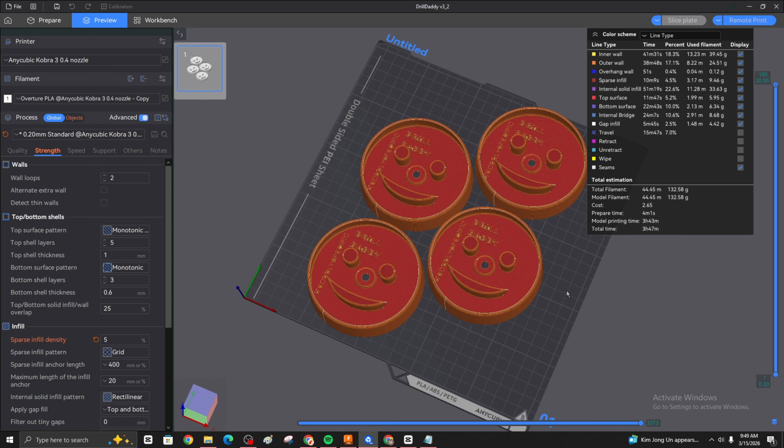And so I want to show real quick what this looks like in the slicer, and how you can kind of see the impact that the infill can have on the structural integrity of this design. So right here I have a plate of DrillDaddies that supposedly would be ready to print, right? So at a glance, these look just like any other print, but if you go down through the layers, you can see right off the bat that there is no structural support going down all the way through the eye holes, through the mouth.

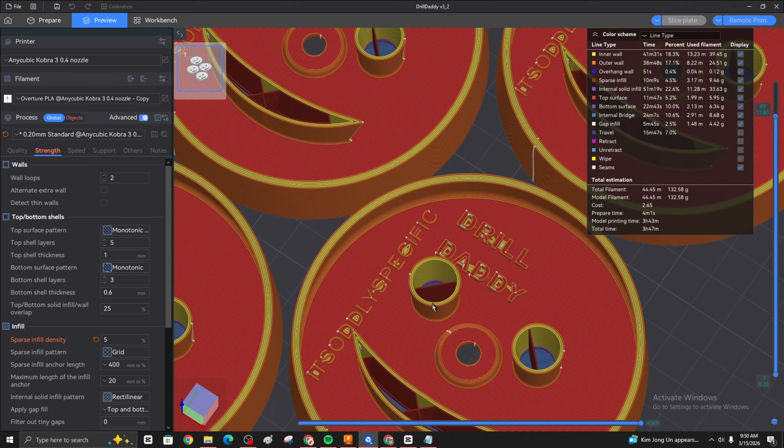Zoom back out. And if I go further down into the interior of the part, this is where we see that there are only 2 incredibly thin walls that are holding what's supposed to manage the torque of a drill. So, obviously this is going to fail when you print it.

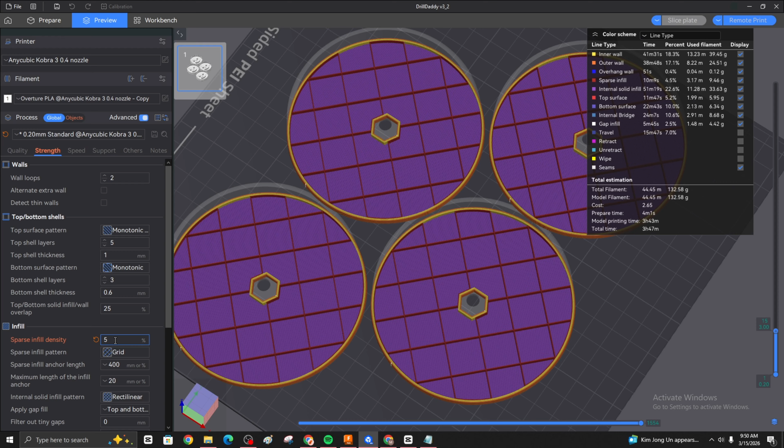Now, the first batch that I had sent out had an infill of 20%, which is what I use on my personal drill when I was first testing this design, and I went through with all my iterations. I'll show you what this looks like on the slicer.

So at 20%, you can see that this is already a drastic improvement. If you're pushing around the body of the part, there's nowhere that your thumbs are going to push through any of the top or bottom walls. The nut is being held in place by quite a few different locations.

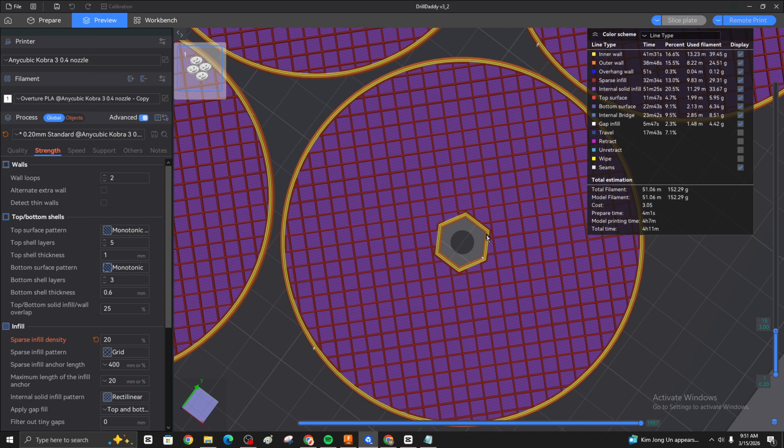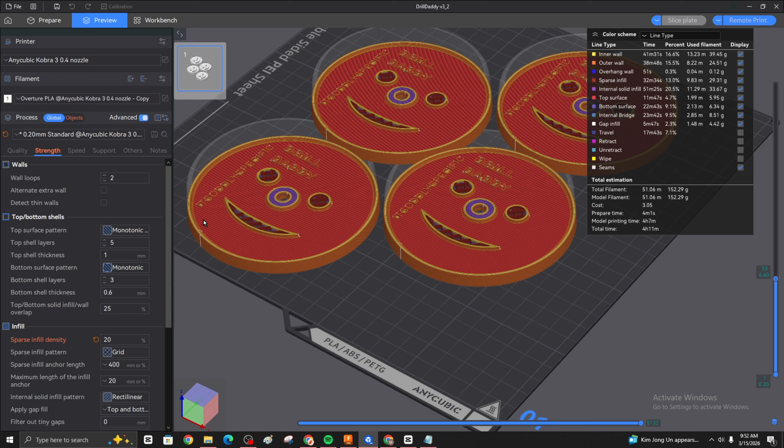And then when you zoom out a little bit and look up through the rest of the print, that grid carries up into the eyes and the mouth and actually provides a bit of support there. So while I'm in here, I'm realizing some people realistically are probably more rough with their tools than I am. Maybe they have stronger drills. And so for this batch that I'm sending out to people as replacements and hopefully future orders, I'm going to do a couple things.

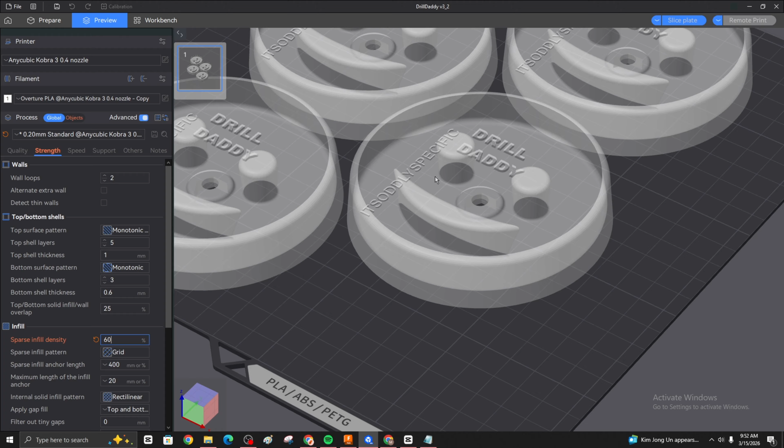I'm going to go from 20% infill. I'm actually going to increase this, I think, to 60. You can see how much denser that is in the eyes. I'm not really too worried about the eyes and the mouth breaking, it's just holding a sponge, but you can see here how much better this is at holding in that nut. It did increase my print time by about an hour, but I'm willing to eat that cost.

And then I want to change the walls. I'm going to increase this to 3 layers. The thickness of the walls actually does a lot for the integrity of a design. Some people actually argue that the wall thickness does more than the infill. The reality is it's probably a mix of the two.

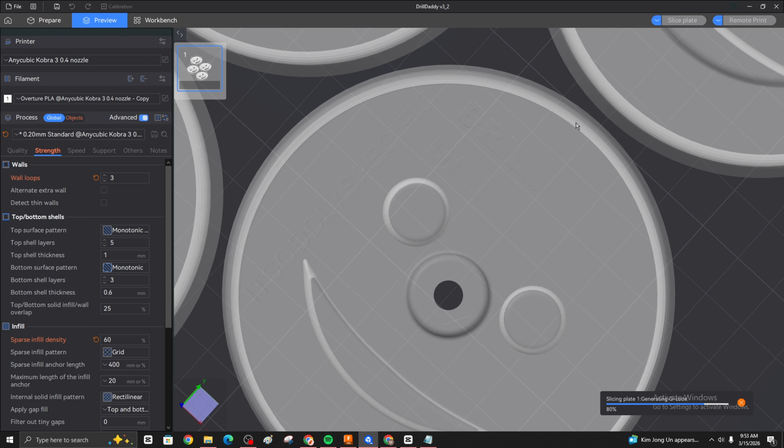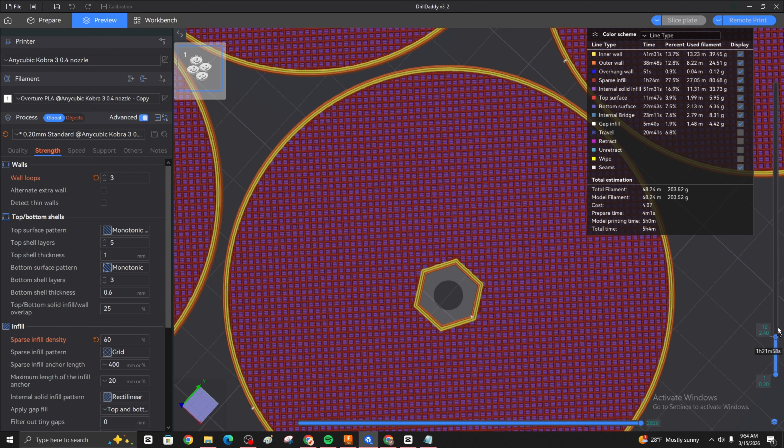So ultimately, this is what we're going to end up with as the interior. I've added about an hour to my print, but you can see that this is going to be a lot stronger. Holding around that nut and then going up through the eyes, there is a lot holding onto it, and we have 3 wall layers on all of the features. Overall, this is going to be a lot more robust of a design, more robust than the one I've been using personally, so I'll probably snag one of these for my personal stash.

But this is actually what I have printing. I've got my printer case right here, and I'm going to be printing these all weekend, sending out replacements. Unfortunately, a lot of the ones I've sent out haven't even been delivered yet, but all of those customers already have an email stating, hey, your product is probably defective, just reach out to me, because I don't want you to have that. I've already had a guy respond pretty quickly, so I'm getting him a replacement. So in 5 hours, I'm gonna do a quick strength test comparison so we can see how that improves it.

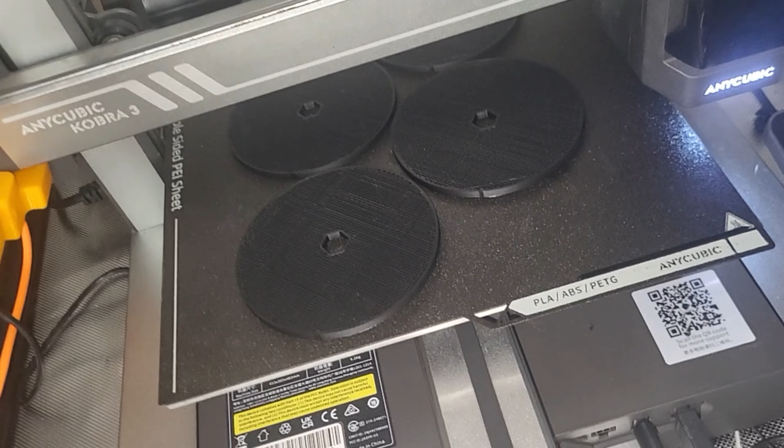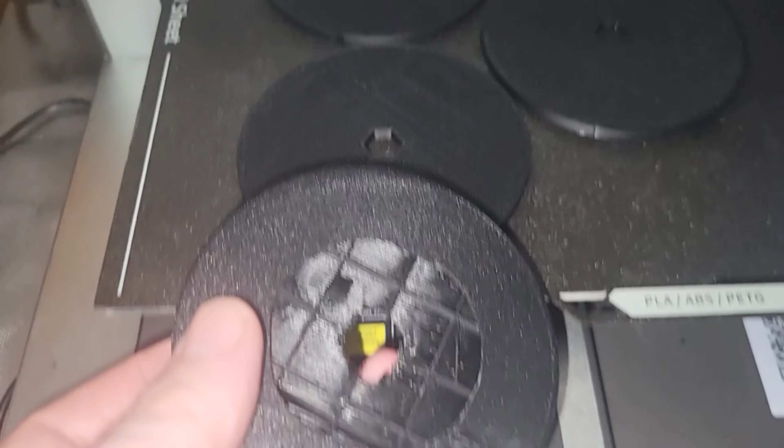Okay, so we're some ways into the print right now. You can see this is what the 60% infill looks like on the interior part versus the 5% that I accidentally sent out. So already this is a far superior print. So we'll let this finish.

Okay, so I have 4 of the improved print profile ready to go. The very first thing is, the print just looks fantastic. Look at that, there's not a single blemish. The eyes and the mouth, I can pull the mouth until my fingers turn white. That's a good sign. Eyes are the same way. Okay, that is fantastic. Pushing on it, right by the microphone, nothing is cracking.

Okay, that is solid. I'm going to pop the hardware in, and we'll see about doing that on the drill. I'm not going to bother with the Loctite because I don't need this to stay in permanently yet. And then all I have to do is make sure it doesn't crack the way the other ones did. Okay. Let me tighten that up. That's a good sign. Yeah. I don't know if you can see that.